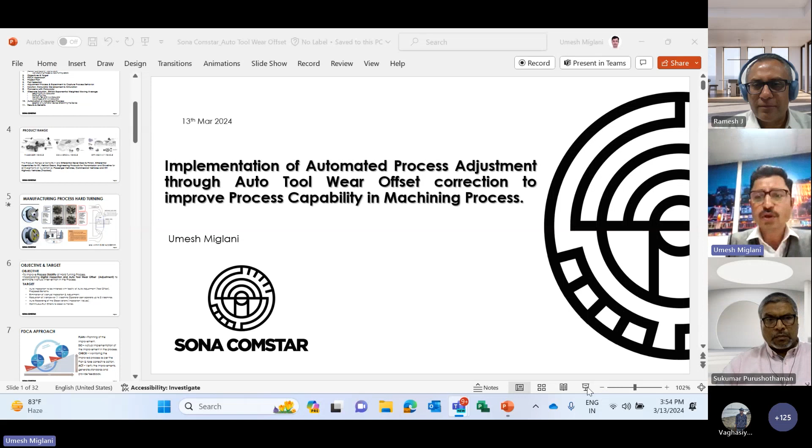Good afternoon all, I am Umesh Miglani, an engineer with Sona Comstar. With 23 years of experience in manufacturing processes, I have honed my skills in implementing innovative solutions for Industry 4.0, like auto tool wear offset, traceability, machine health monitoring, AI vision-based inspection. Today, I am excited to share insights from our journey and the impactful results we have achieved so far. I look forward to engaging with you on the topic of auto tool wear offset into our CNC machines.

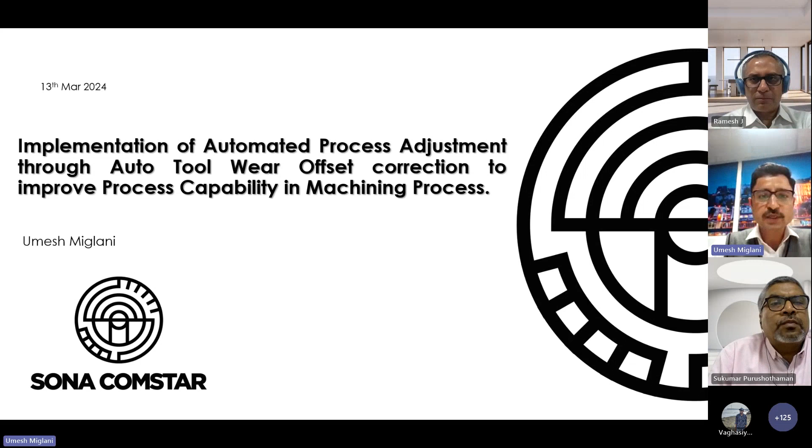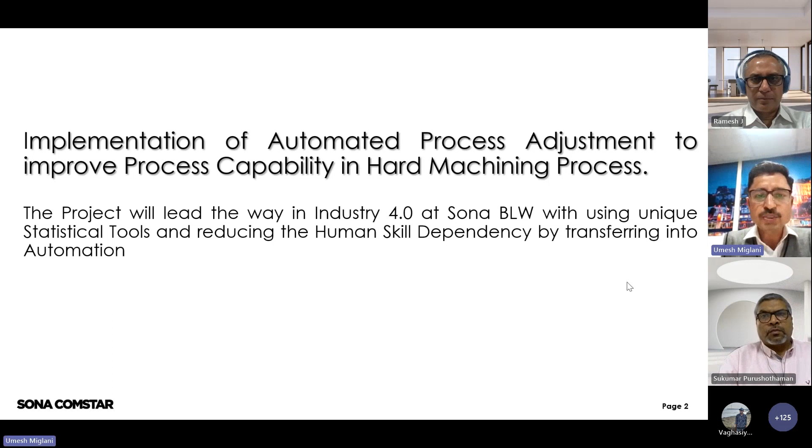So the project will lead the way in Industry 4.0 at Sona BLW, using a unique statistical tool and reducing the human skill dependency by transferring into automation.

This is the content of my presentation, starting from company brief, where we implemented this auto tool wear offset manufacturing process in our hard turning operations, our PDCA approach which we applied onto this project, and finally the results and benefits which we got.

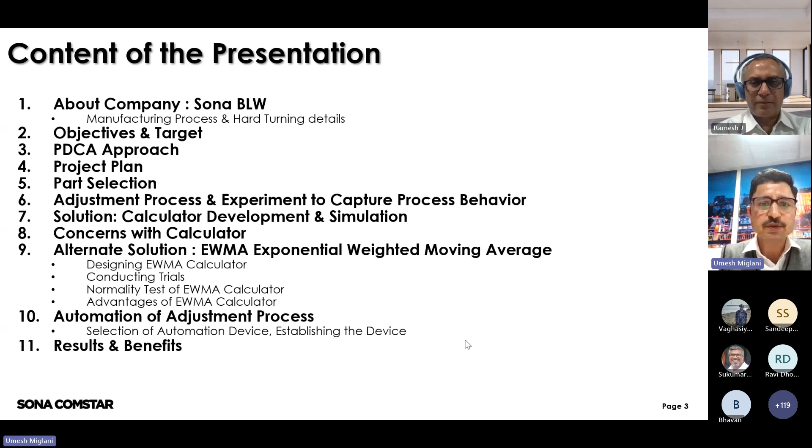The product range at Sona BLW includes differential bevel gear and pinion, differential assemblies for EV, helical gears, engineering products for transmission and driveline for all three segments: passenger vehicle, commercial vehicle, and off-highway vehicles.

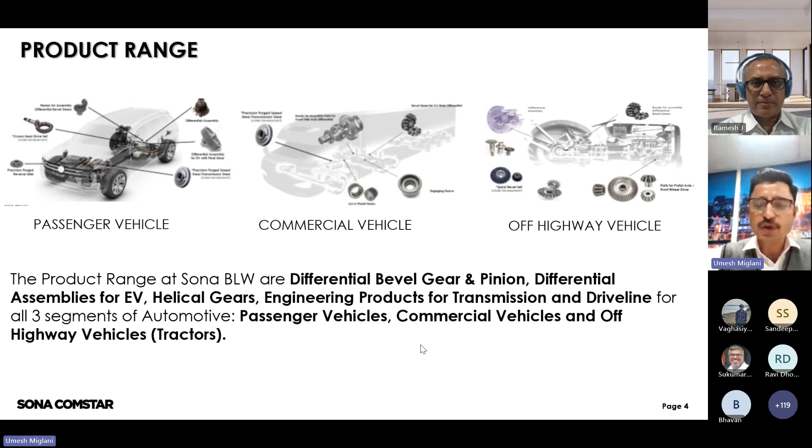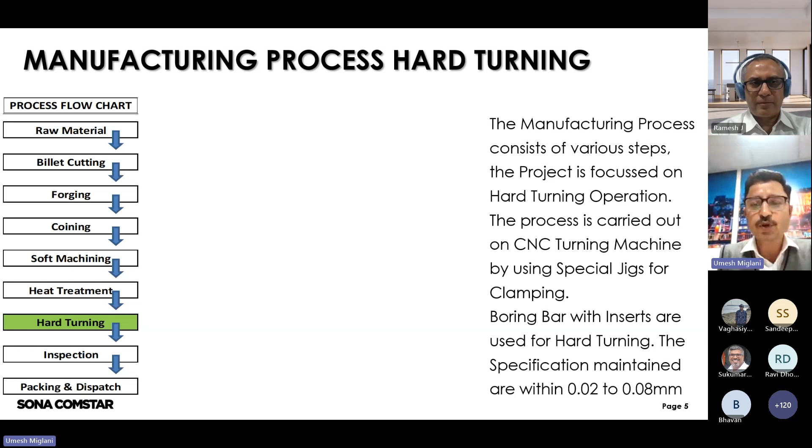This manufacturing process of hard turning consists of various steps. The project is focused basically on hard turning operation. This process is carried out on a CNC turning machine using special jigs for the clamping of the part. Boring bars with inserts are used for hard turning, within a specification of 20 to 80 micron. These are the specific jigs which we use for hard turning operations.

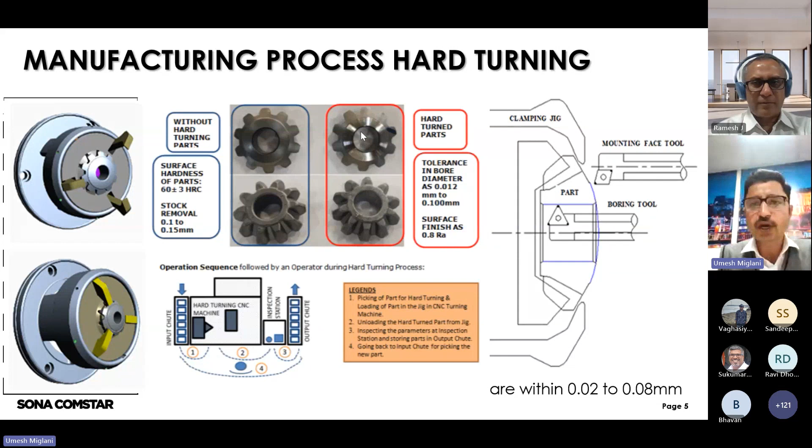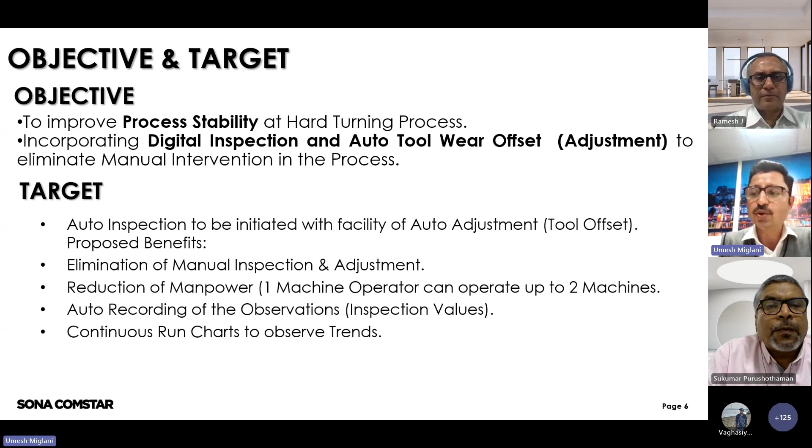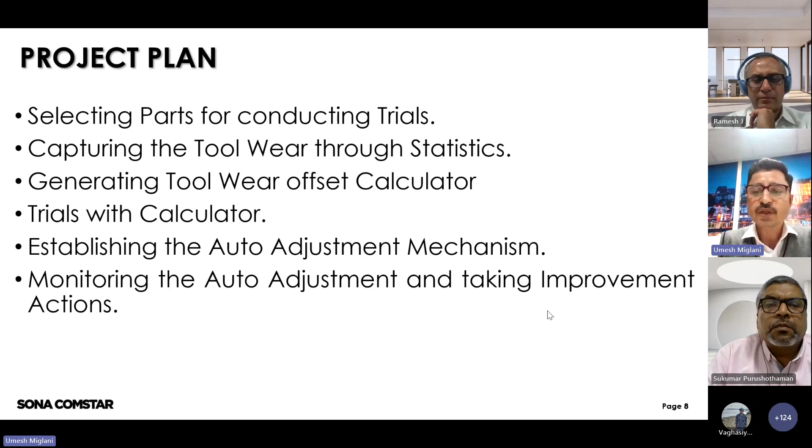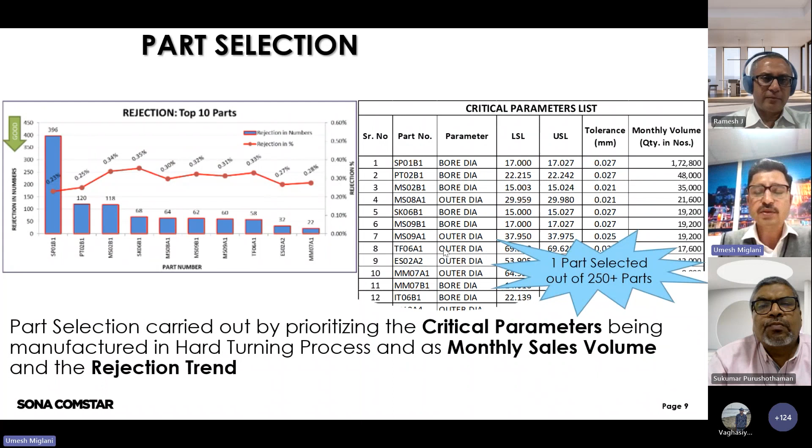This is the part selection criteria carried out by prioritizing the critical parameters in manufacturing hard turning operation, based on monthly sales volume and rejection trend. We selected one part out of 250 plus parts which is having higher rejection in our rejection criteria. So this is the selected part.

We selected one machine also for taking trial, M71. The tolerance for the part is almost 27 micron.

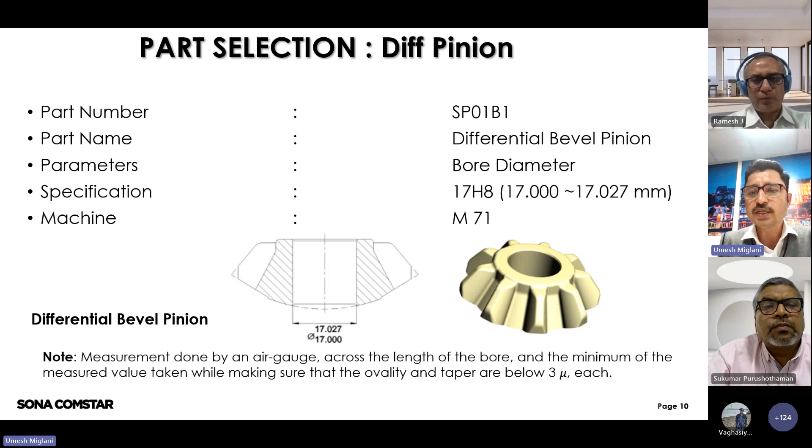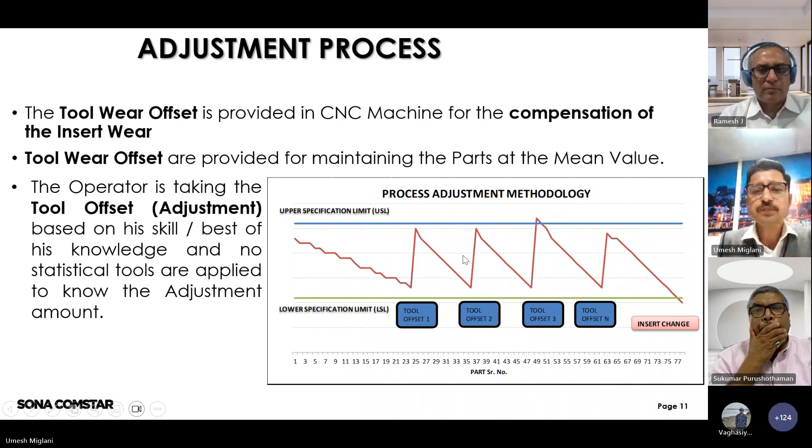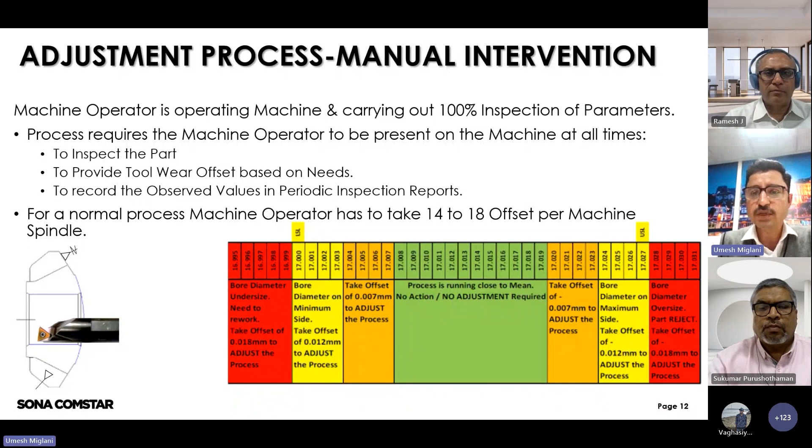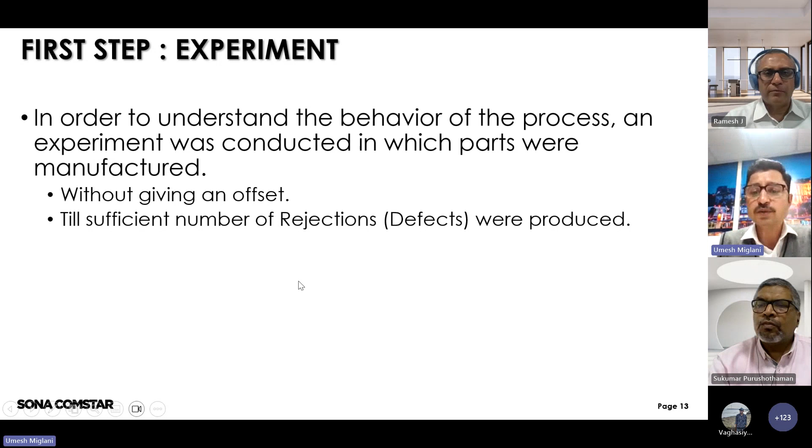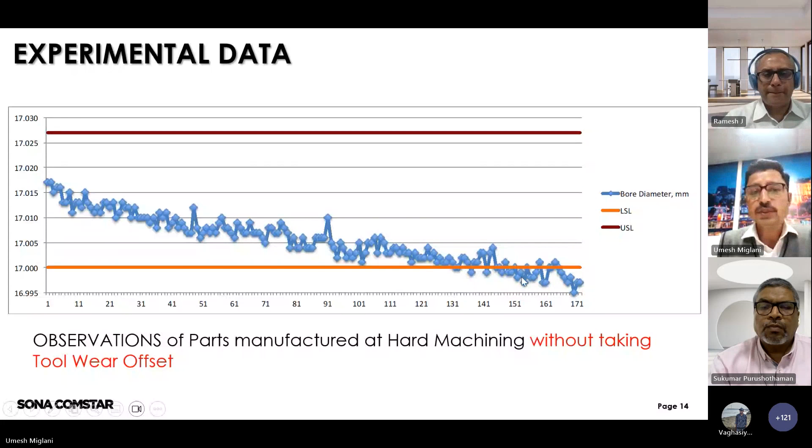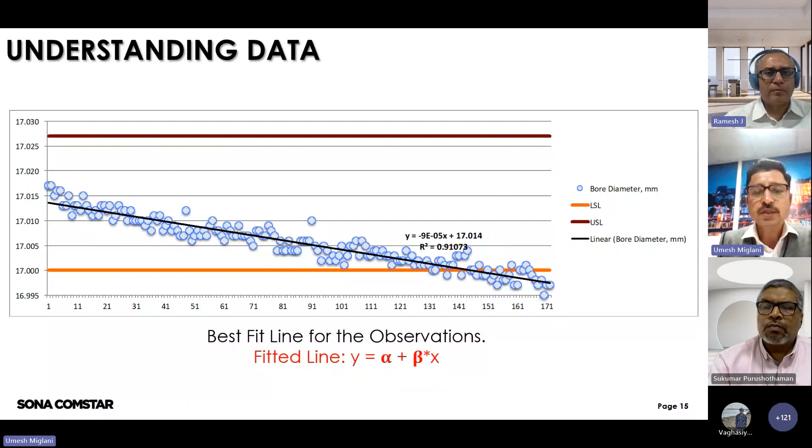This trial is conducted without giving any offset into the CNC machine. Then we understood the data by plotting a best fit line and observed the equation for where to adjust.

Then we simulated the data with respect to if the operator does the offset every part, to see how it looks. You can see the dotted lines are the simulated lines, and the colored lines are the natural tool wear. The difference between CP and CPK: if the tool naturally wears, CPK comes around 0.3755. If the operator does frequent offsets as per inspection data or need, the CPK comes to 2.47.

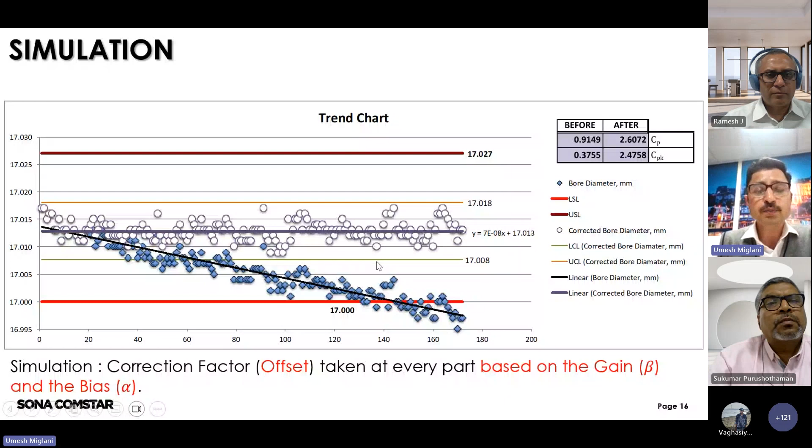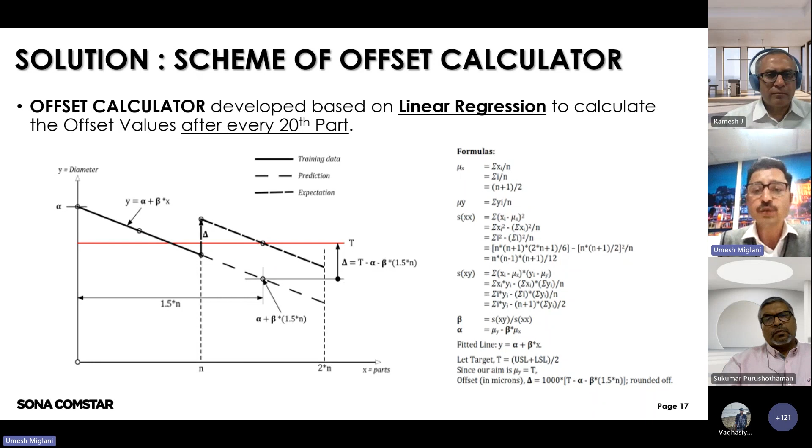So based on this simulation and actual tool wear, we developed an in-house calculator based on linear regression to calculate the offset value after every 20th part. This is the mathematical model which we created for the first experiment, and we started the trial on the machines.

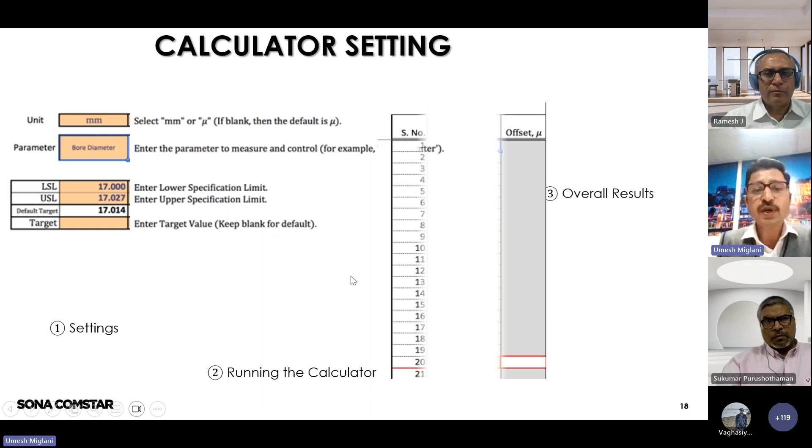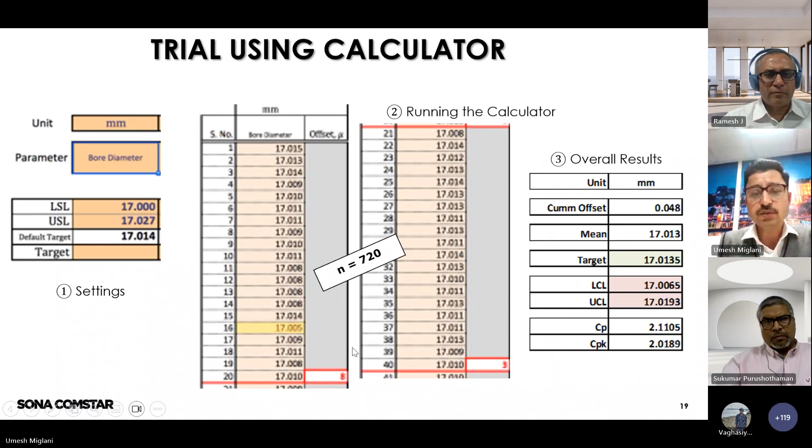We provided one laptop on the machine near the operator. He sets the part as per the part specification, inspects the part, monitors 20 readings into the Excel sheet, and does the offset correction as per the requirement from this calculator.

We conducted a complete trial with this calculator and observed the CPK coming to more than 2 on almost 720 numbers which we produced for the specific part, with this linear regression mathematical model calculator which we prepared.

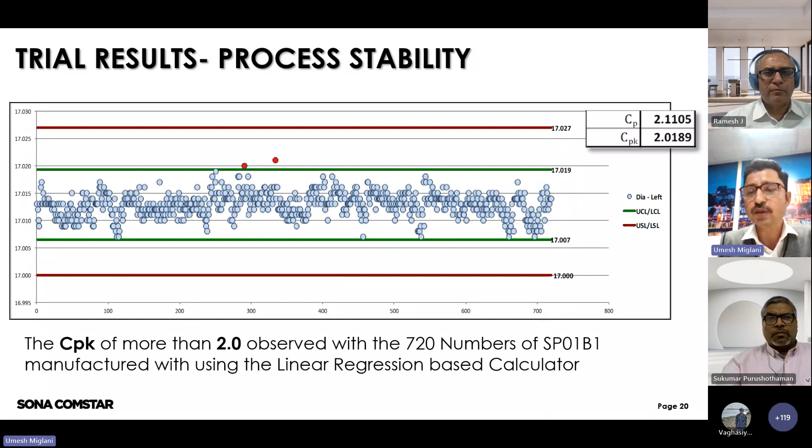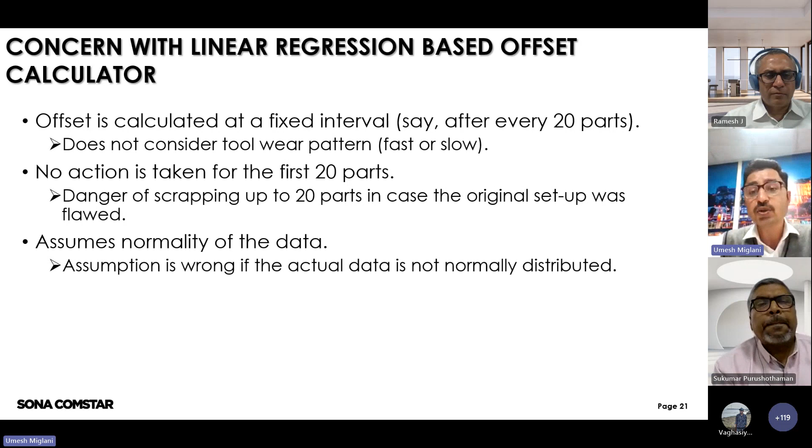So we had some concerns during these trials. The offset is calculated at a fixed interval, say after every 20 parts, so it does not consider the tool wear pattern, whether it is coming fast or slow, and we can't take any action for the first 20 parts. Those 20 parts can be out of specification or within specification. Also, the assumption is wrong if the actual data is not normally distributed. So these are the concerns.

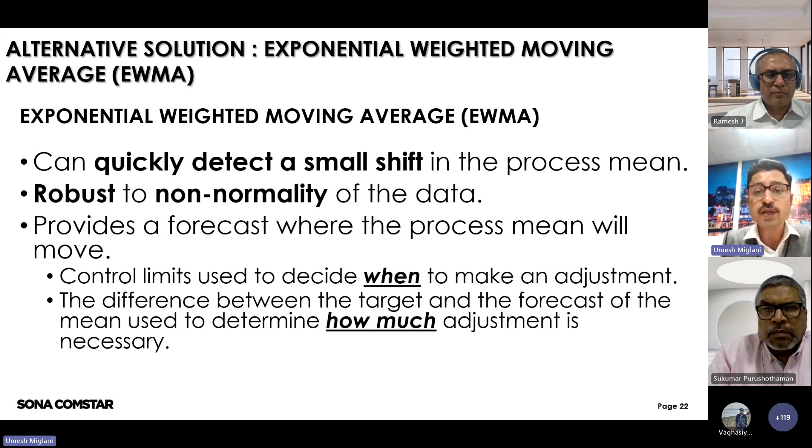Then we thought about an alternate solution for compensation onto the CNC machine. The team suggested exponentially weighted moving average, EWMA, which can quickly detect a small shift in the process mean, and is robust to non-normality of the data. It can forecast where the process mean is, like when to adjust the process and how much adjustment is required. So this is the application of EWMA.

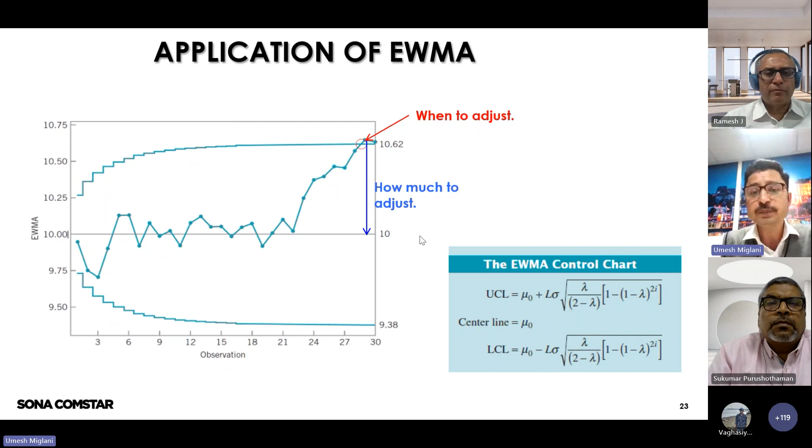So we see the advantages of the EWMA method. One is we can predefine the L value into the offset calculator based on the requirement of process capability. The resultant data output of the EWMA chart is normally distributed.

Immediate response can be provided through EWMA. It can calculate the control limits within the first 3-part sample manufactured on the CNC machine. As an effective process control tool, it regularly learns the process behavior and acts accordingly. So with these advantages of EWMA, we thought it is a much better option for auto adjustment process.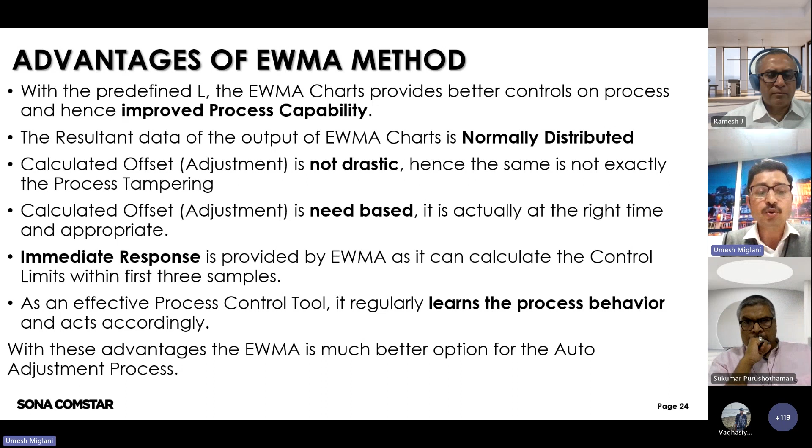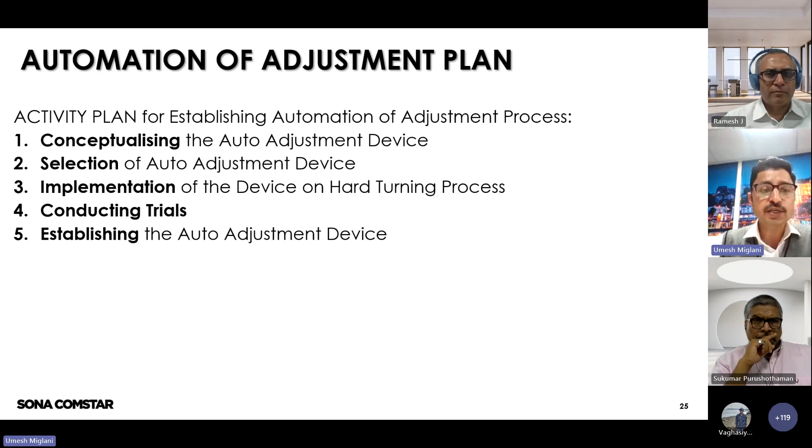So we prepared an automation for adjustment plan onto one CNC set. These are the activity plans starting from conceptualization, selection of auto adjustment device, implementation onto this hard turning operation, conducting trials, and establishing the auto adjustment device.

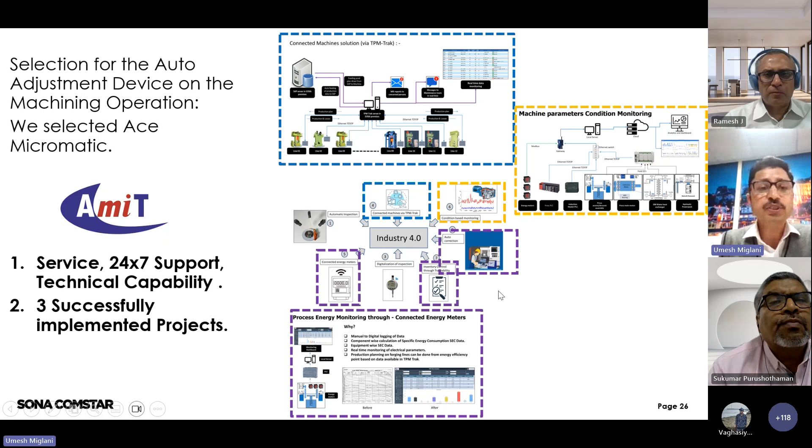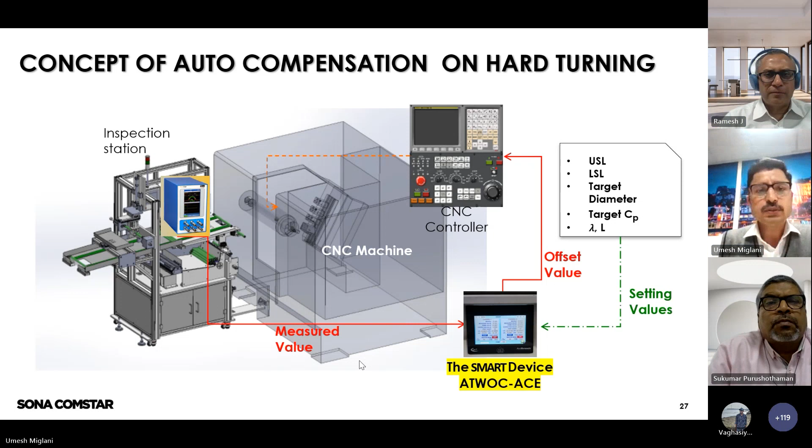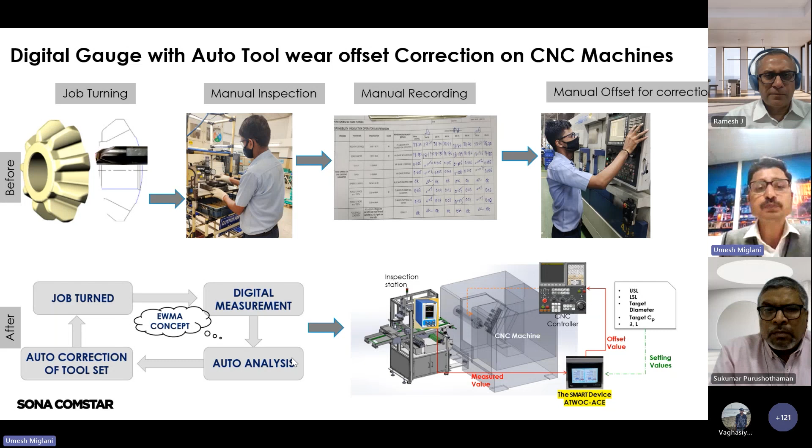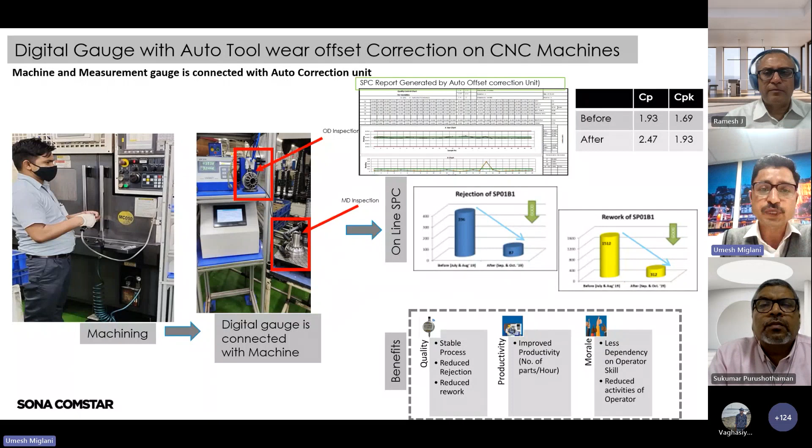Based on the learning and the results which we got from one model machine, we plan to diffuse this into our other plants and our sub-suppliers.

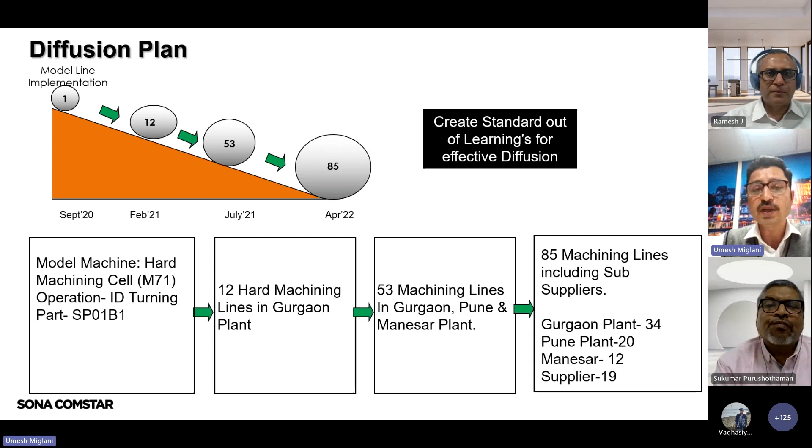We started this journey in 2020 with one machine, M71, and then we planned for 12 machines in February 2021 on hard turning machine lines converted in Gurgaon with auto tool wear offset. In July 21, we converted 53 machines across our 3 plants, and by April 22, 85 machines in totality have been implemented with auto tool wear offset, including 34 machines in Gurgaon, 20 in Pune, 12 in Manesar, and 19 machines at our sub-supplier.

Overall benefits and results which we got from this system: a 90% reduction in our overall machining rejection. This is the major achievement which we got from this auto tool wear offset.

In terms of quality: stable process, reduction in rework and rejection, productivity improvement with more parts per hour, and in terms of people morale: less dependency on operator skill and reduced manual inspection activity for the operator. These are the overall results which we got from this system.